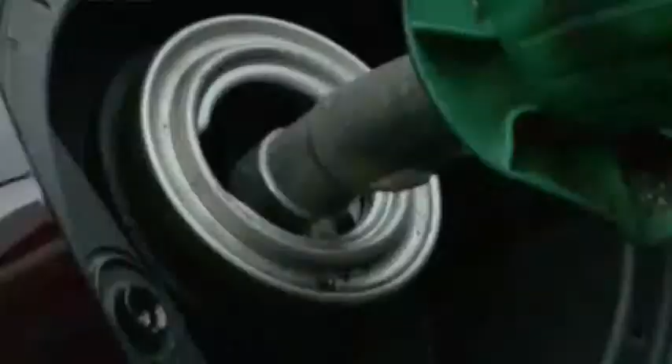This is the reality of combustion engines we see every day. In Germany, the courts say now cities can outlaw combustion engines. In the UK, they are taxing diesel until they go away. But if you have an older diesel car, driving in some city centres could cost you £20 a day. Vehicles' exhaust is part of the problem, while combustion as such is the problem in general.

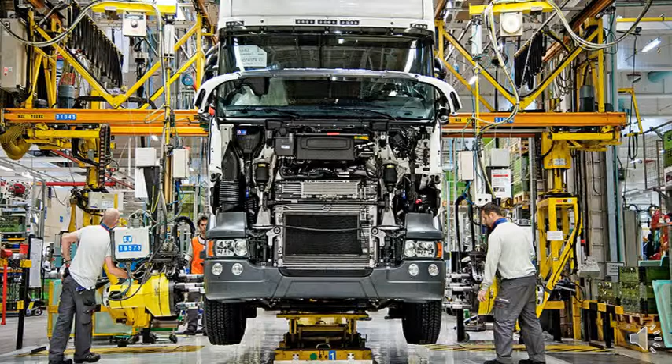Is abandoning the hundreds of millions of vehicles that are powered by internal combustion engines the answer? Are the millions of jobs that are going to be lost? Are the trillions of dollars worth of infrastructure, of development and know-how that we've developed over the last century and a half on internal combustion engines? Is throwing that all away the answer? I don't think so. We've already found a way of converting one engine, the jet turbine or the gas turbine, to operate on heat alone.

I'm Virgil Perryman. I've been an inventor and an innovator for most of my life. But 15 years ago, I entered into the most compelling period of my life when I began a search for an alternative energy source that would replace plasma for high temperature applications that were involved with waste management and other chemical processes. We turned to the sun and we found that the solar thermal of the day was ignoring 60% of the energy available from the sun because they ignored the infrared spectrum, and we'd invented our own.

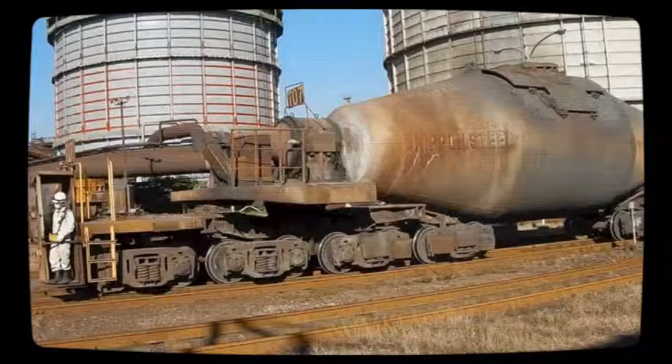We found that after we had a better solar collector, we now needed a better storage system. 800 degrees that molten salt is barely capable of wasn't sufficient. So we decided to look at another industry. The industry we looked at was the steel industry, and we were aware that crisscrossing Europe for the last 90 years or so were these massive torpedo-shaped iron carriers that were carrying molten steel at temperatures in excess of 1600 degrees Celsius, and there'd never been an accident.

This excited us, so we approached the company that was manufacturing the refractory and the other containment for this storage technology and used it for our own. We still use this same company. They have helped us develop our prototypes, our first, second, and third generation, but now the Perryman battery, as we've decided to name it, can store 3 times as much energy, is totally transportable, portable, can be charged from various sources, whether it's direct thermal, the sun, or even magnetic induction, which allows us to store hundreds of megawatts in

just a few hours. Our third generation, it is now possible to store gigawatts of energy, and at a cost that is a fraction of that of electrochemical batteries, and size, space, and volume generally of less than a tenth of the size of electrochemical batteries. And this has opened up so many new applications and possibilities. We can retrofit coal plants. We're using the energy that we collect from wind, hydro, or solar. We can retrofit gas turbines and use the same high temperature, pure thermal energy and avoid combustion.

But perhaps the most exciting innovation, and the one that would have the greatest impact on the marine and the shipping industry, would be our ability to retrofit any internal combustion engine with pure heat and air. These turbine engines power our aircraft, other transportation, and generate our electricity. But all this comes at a terrible price: pollution. Perryman Technologies has a solution now. We can end the pollution without abandoning these marvelous engines.

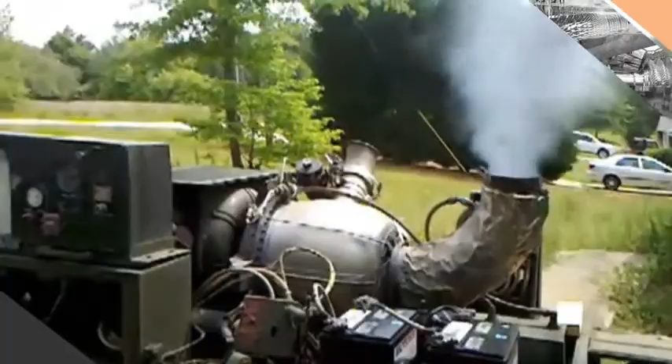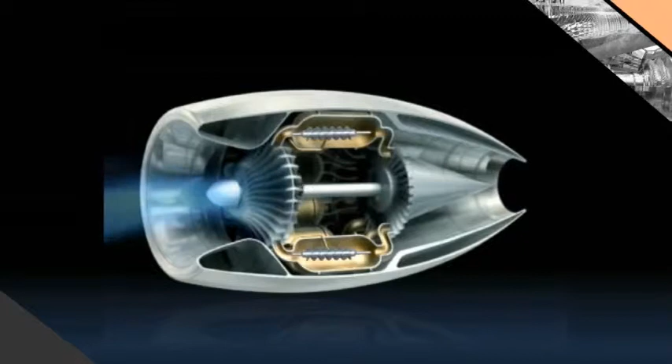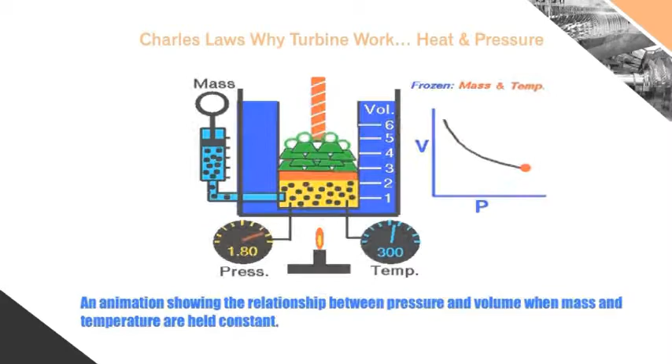We simply stop using combustion and change the way we are powering these turbines. We use pure heat delivered with our technology and a simple heat exchanger. As the compressed air comes into the turbine, we heat it without burning any fuel. In fact, the turbines work better than with combustion. How? All internal combustion engines work on the Charles principle. As contained gases are heated, the pressure increases. You see, all you actually need is heat to do work, and we provide a non-combustion heat source.

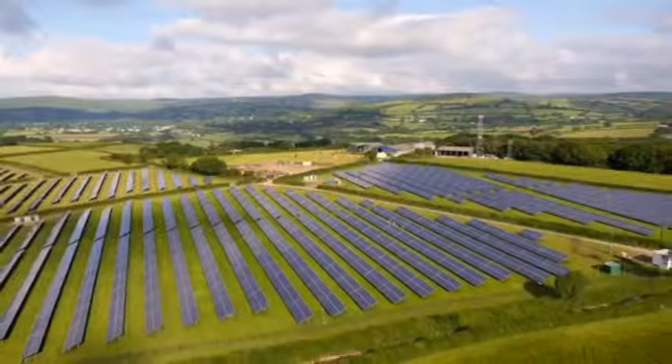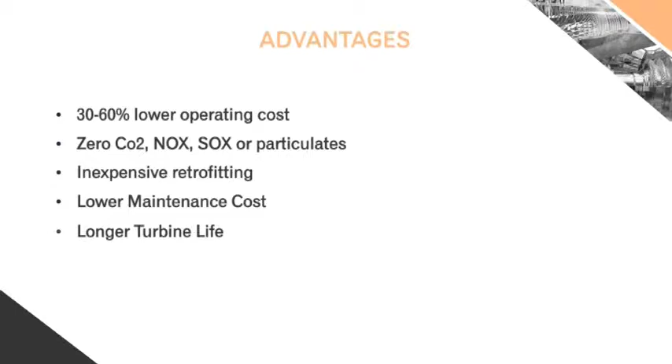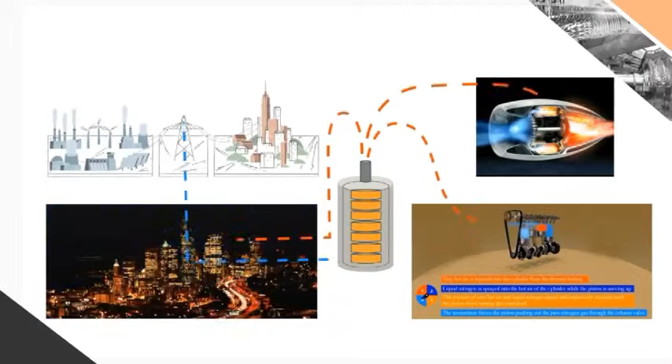This heat can be sourced from the wind, the sun, and the wasted energy at night from the grid, and stored in our patented thermal storage battery. The advantages are many, but most of all, we can end combustion in these turbine engines. No more NOx, SOx, CO2, zero pollution. While you save, you can help make the air cleaner for everybody, safer for my generation and the generation that follows. Thank you.

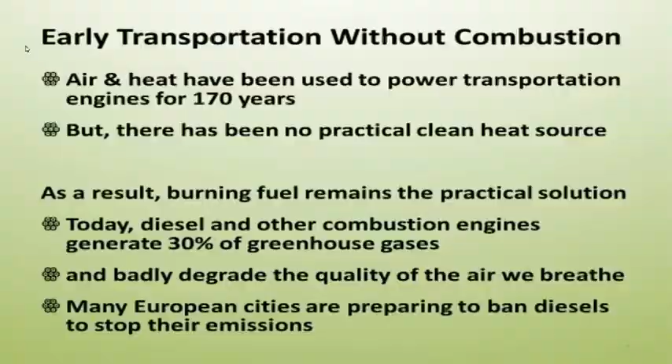In the past, wind and renewable energy were the norm. In the early days of power transportation, heat and air drove transportation and industry. Compressed air powered submarines during the Civil War, the Paris metro, trains, torpedoes, and even a drone many years before the Wright brothers.

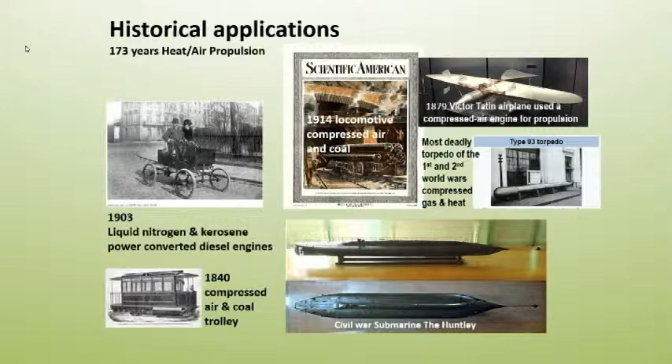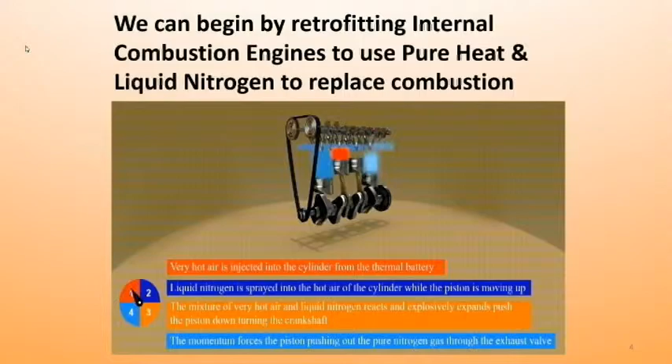We are redefining our approach to replace combustibles with heat and liquid nitrogen as propellant. The principle is much the same with turbines, which don't need a combustible propellant. The turbine's compressor stage provides air at sufficient pressure, which enables the heat from our heat exchangers to expand the air and generate the thrust.

Let's follow the process step by step. The heat from our battery is delivered through the intake manifold to the cylinder before compression. The piston compresses the already hot air, which further increases the temperature until the piston is reaching full compression. Then liquid nitrogen as propellant is injected.

Combining with the very hot air, it expands dramatically, pushing the piston down the same way as combustion. Finally, the engine's momentum forces the piston up and the expanded nitrogen out from the exhaust manifold. By the way, nitrogen is 78% of the air we breathe.

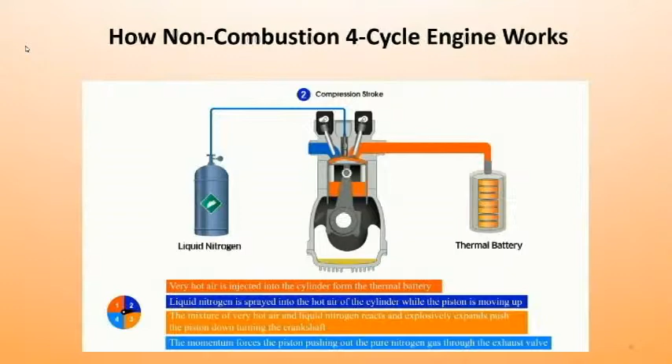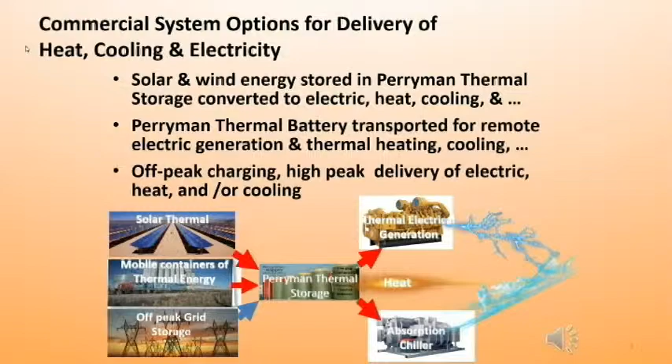We have clean or underutilized sources for the heat we can deliver: wind, sun, hydro, and wasted electricity when there is low demand. The Environmental Protection Agency and the International Maritime Organization recently enacted a series of new regulations designed to reduce emissions from large ships and improve air quality. Large ships such as container ships, tankers, bulk carriers, and cruise ships are significant contributors to air pollution in many of the world's cities and ports.

He said industry will be installing ballast water systems like crazy, while simultaneously scrambling to comply with the IMO global 0.5% sulfur cap. We have already tested a simple two-cycle engine which uses the same principle as the huge marine diesels which power our ships. Preheated air is sucked in, compressed, liquid nitrogen injected, and like the four-cycle engine, propulsion is achieved without combustion. This will help our marine industry meet the requirements in 2020.

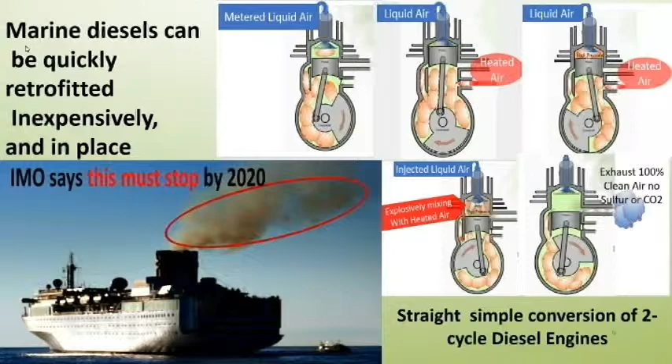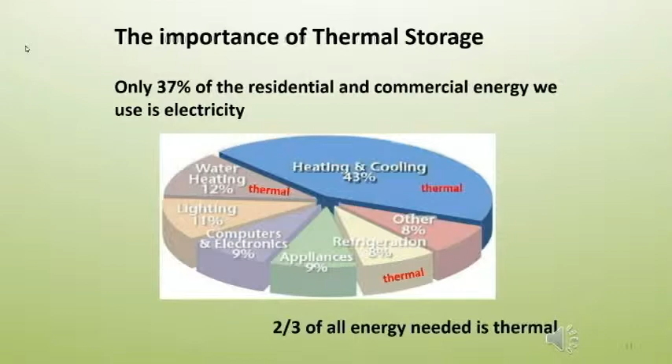Many scientists say, for a solution we only have to look at what Mother Nature is doing. Like our own planet, we have discovered that the best way to store energy is as heat. If we can get the world to change the way they see energy, we can avoid the worst. Two thirds of all energy we use is thermal energy. So we have focused on storing energy, like the planet, as heat.

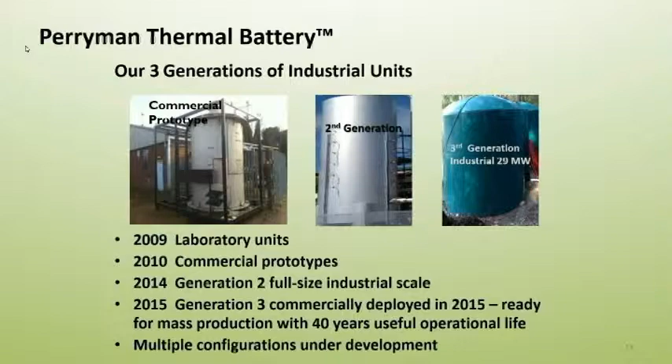To contain this stored energy safely and for a long time, we are using layer after layer in the same manner as the planet. While the core has a temperature of over 3000 degrees Fahrenheit or 1800 degrees Celsius, the surface can be touched and has the temperature of the outside of your hot water heater at home. We have over the last 9 years refined and tested our thermal storage devices, as they are the heart of a system that can bring an end to combustion.

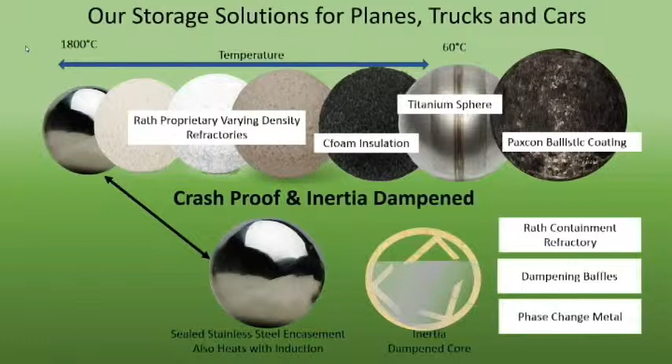To provide the heat that can replace combustion, we have scaled down our thermal batteries to sizes that can power cars, trucks, and airplanes. We have made them safe and almost indestructible. We use the most efficient and proven industrial method to charge our batteries. It takes only a fraction of the time necessary to charge the competing electrochemical batteries, and with a loss of less than 2% compared to about 8%.

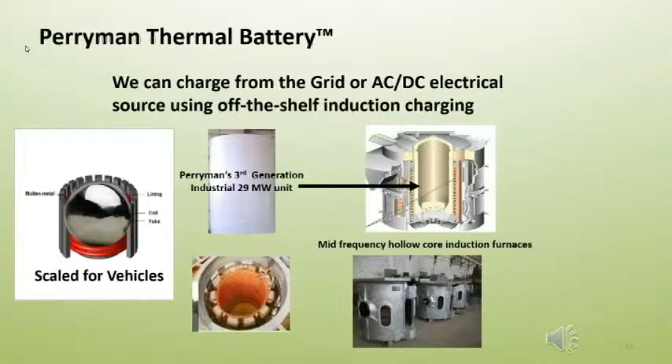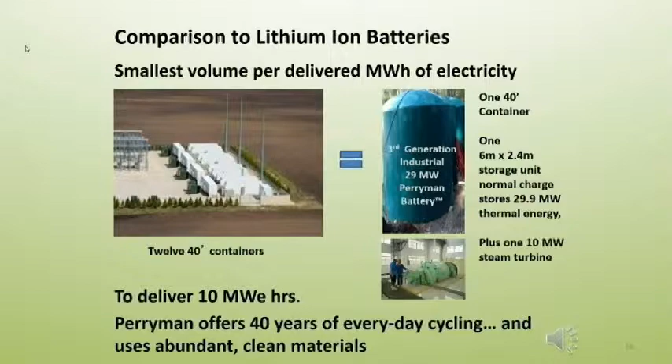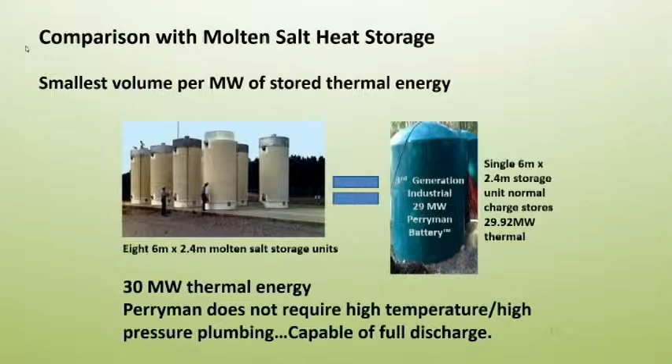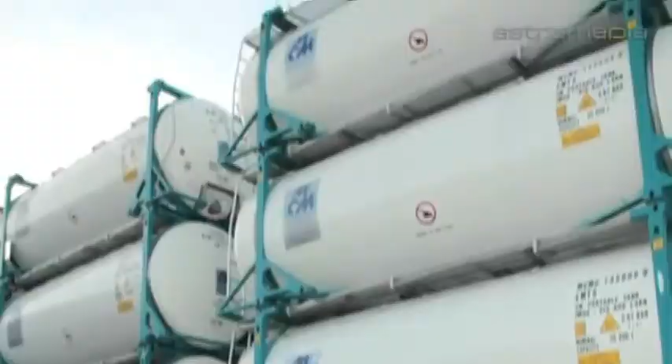We achieve an energy density that is only exceeded by nuclear reactors, but of course without the radiation. Compared to electrochemical batteries, we use only 1/10 the space. And we can store 10 times more energy in the same space and weight than any other storage method at a fraction of the cost. When it is necessary, we can make energy transportable, like these 20-foot liquid containers on trucks, trains or ships.

We cannot reverse the damage we inflicted on our planet and its environment, but we can work hard to find ways to stop further damage. We have to act fast, as otherwise the consequences are dire. Perryman Technologies can provide solutions, reducing the impact of internal combustion engines and gas turbines without making these reliable workhorses obsolete. We are not eliminating millions of jobs and hundreds of billions of dollars of infrastructure investments the internal combustion engines represent, but bring them to a new and clean use.

We can also help integrate the energy we produce from wind, sun, water and other natural resources more efficiently and roll back a little the impact our industrial age has caused. We at Perryman Technologies have worked over 10 years developing and refining our solution. See for yourself what the planet may look like if we don't stop global warming.

Cities like London and other cities in Europe will be inundated, as will other coastal regions around the world. City after city will be underwater. From New York to Tokyo. Entire countries flooded, billions of people displaced, watching in awe how city after city disappears and how the globe map is changing.